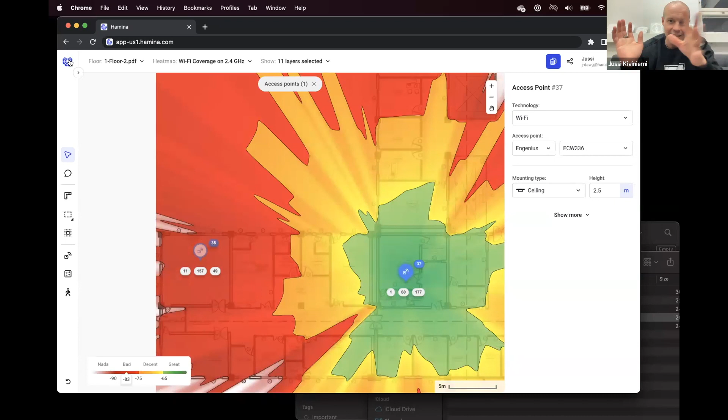All right, so today we're going to focus on demoing the product, looking at designing Wi-Fi, 4G, 5G, BLE, a little bit of the cabling side of things, as well as reporting. I think that's what we promised in the webinar advertisement, so least we can do.

How much time do we have? We have plenty, so should we start from scratch? We're just going to make a new project. Let's start with a university, and then we'll look at a more challenging environment later, like a warehouse, something like that.

Regarding our tool, it's completely web and cloud based, 3-dimensional, GPU accelerated, you name it, we got it. And this is what it looks like.

On the left hand side, we have the selector of projects, a couple of buttons, and then the main tools are here, like editing, scaling, drawing the walls, placing access points, all the key tools are here. On the top right hand side, we have generating reports, sharing the project, and then some account details.

All right, so I said let's start with the university. I'm just going to drop in a PDF floor plan, but anything is good, like PNG, JPEG, PDF, CAD files, whatever you throw at it. Even WebP, if you take images directly from your phone, that's all good, that can totally be used.

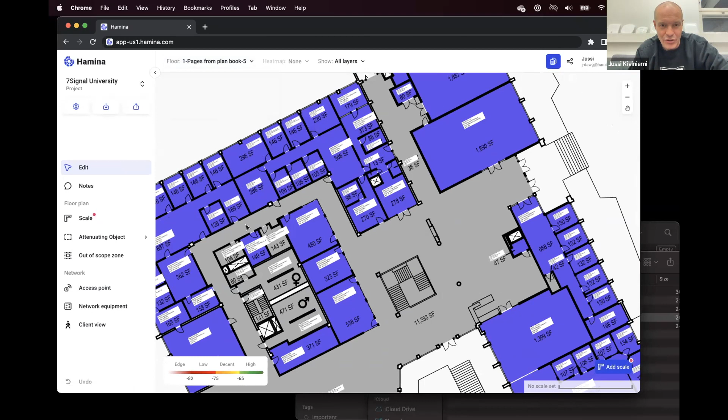And now, first step in a drawing like this, Jim, what would you do if you saw a floor plan like this? Start drawing walls and doors and things like that.

Exactly. But should we do something about the background colors first? Because this looks pretty ugly, right? Yeah, go black and white or grayscale. Yeah, let's at least remove some of the color. JJ just owned all of us in the chat by saying scale.

Yeah, exactly, sorry, I interrupted your demo, do your thing. Step number 1, scale, for sure. But step number 0, I would say, is clean up the drawing a little bit. And we have this color removal tool, so you don't need to go to GIMP or Photoshop or PowerPoint to edit images. Who edits images in PowerPoint anyway? This guy, but nobody else.

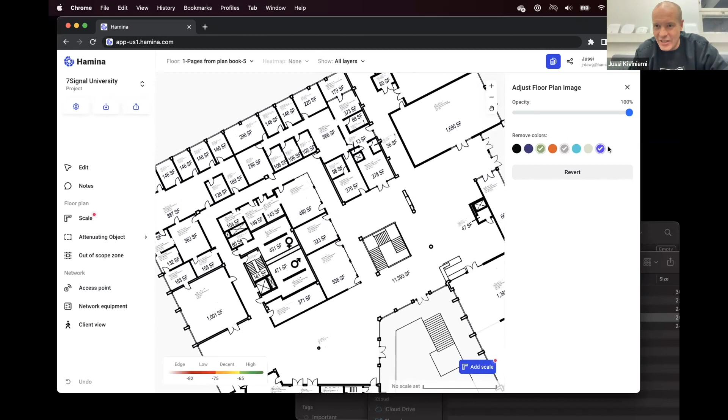So anyway, while the system was importing the image, it scanned it for colors you might want to remove, and I clicked on some of those, and now it looks a lot cleaner. It actually makes sense now to place notes and heat maps and things like that on the map.

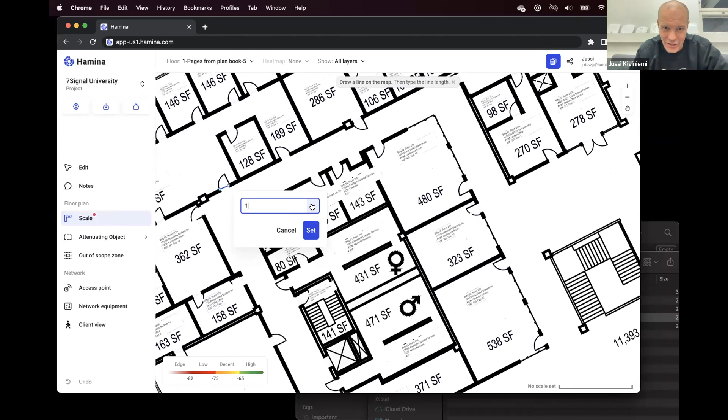But yeah, like Jim said, I guess we should probably put in some kind of a scale. If we did the do-not-try-this-at-home scale, that would be like 1 meter for the doorway, or you can change it to feet by clicking here. Don't try this at home, I just did it because I'm too lazy to find anything else. But essentially, we would just find a place where there's an actual scale and put it in. All right, so that's done, scale is done, and no more blinking warning lights in the tool.

Next step would be either drawing the walls, like Mr. Vajda said, or we could actually cut some corners. Since this is a PDF file, and PDF files most of the time are vectorized, when you look under the hood on a PDF file it has all this crappy stuff. But from all of that, we can actually start seeing, these actually look like windows a little bit.

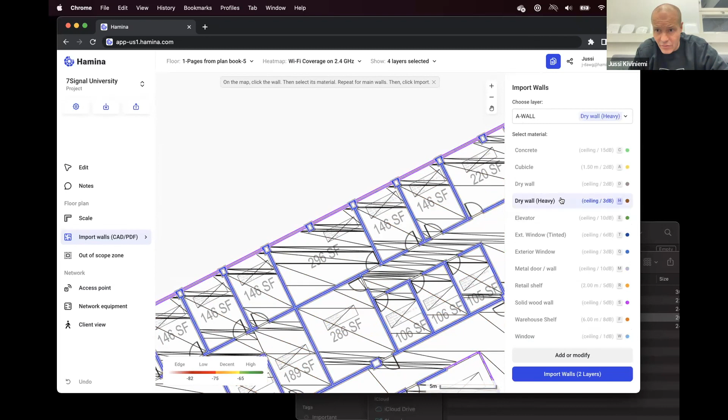So I'm going to say that's window layer in this PDF. And maybe those are some kind of drywall. And then maybe those look like doors.

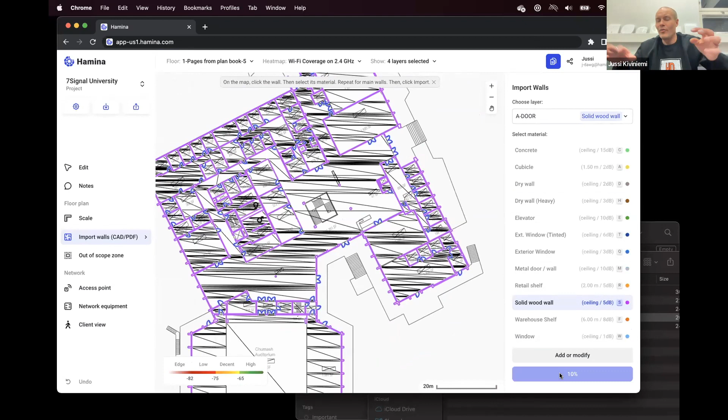Now anything that has color on it will actually be automatically assigned into walls. This is starting to look pretty good. We can always bring back more walls later, of course, and it's completely integrated into the UI. But let's first bring those walls here and see what happens.

So this just means we do not need to draw the walls. And here you can see the end result. That actually came pretty good. There's the windows with blue color, there's the drywall. And this works on vectorized PDFs as well as CAD files.

Since we're still missing a little bit, like here, we didn't get the staircase, so let's actually draw that manually. I'm just going to say that's obviously a brick wall. Since it's probably fireproof, I could even use concrete and probably not go too wrong with that. So I'm just going to say that's concrete right there.

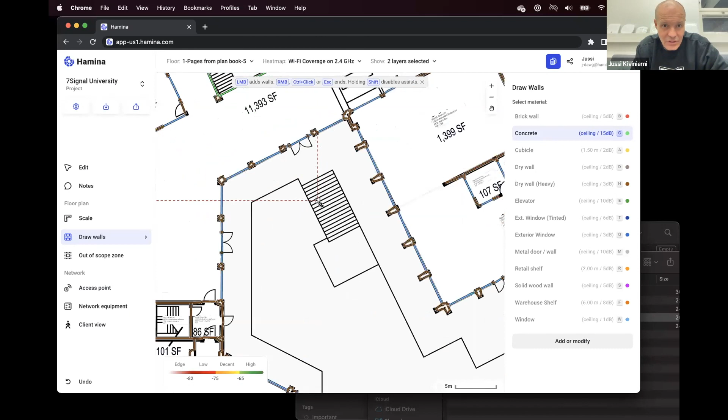We can manually, of course, fine tune this as much as we like. So there we have a pretty decent model for moving on. Okay, then we're ready to start designing.

Let's start with Wi-Fi, the easy, obvious stuff. Since we are not in for anything but latest and greatest, I'm just going to deploy the Aruba 655s. And this is kind of the minimum set that we need to use.

Since this is a carpeted indoor space, I'm just going to say, yeah, sure, ceiling is fine. And then the average, or this height, is probably all right. You can choose from different mounting types—kudos to Drew Lentz. There's also a Wi-Fi stand here and all kinds of wall mount, floor mount, L mount, whatever you have. And I guess we're ready to start designing.

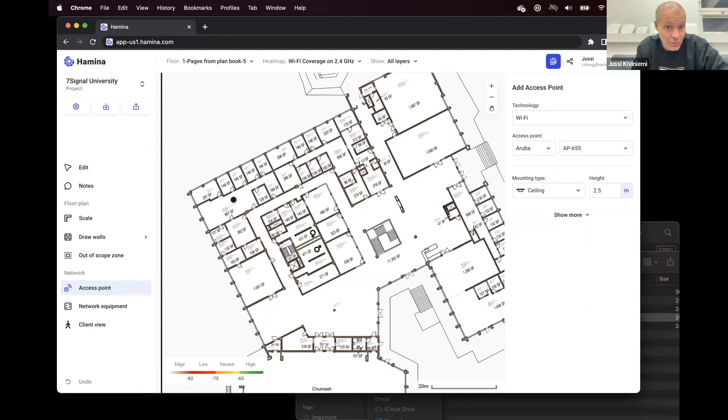And one of the key things for design, of course, is requirements, and that should be the first and foremost thing. For us, design requirements is not only about numbers, but it's what you call them. So this is important in customer deliverables and reports, because this is what the customer will also see.

Anything above -65 is high and green. Anything between -65 and -75 is decent and yellow, and so on and so forth. And that is then reflected on the map as well.

And as we start painting the map green, if you will, let's look at 5 gigahertz instead of 2.4. Well, let's actually look at 6 gigahertz since we have 6 gig capable APs. All right, and yeah, that's starting to look good.

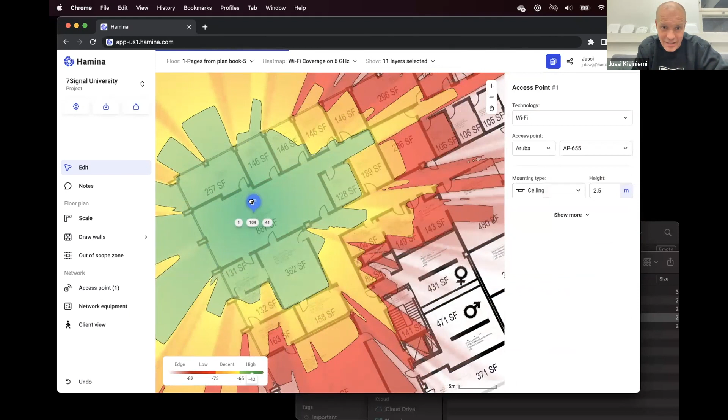I'm going to hide the AP numbers. I'm going to hide the walls since we are done with the walls, and we can start designing. Of course, this doesn't show up to you as real time as it is on my local computer, but you can see as I move the AP, the coverage patterns immediately update.

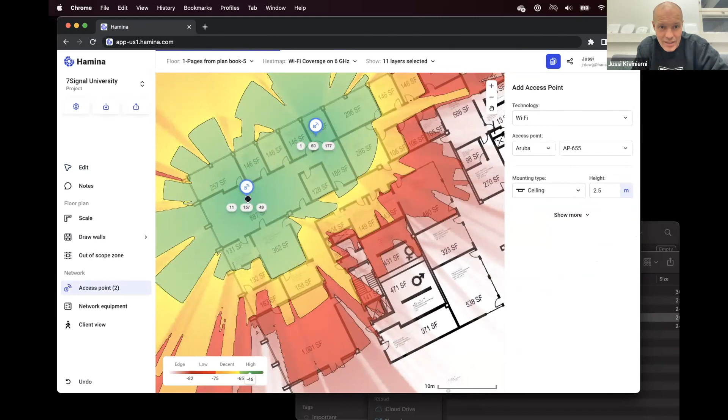And as I place APs, you can see the channel planner is run every time I do changes to the network, so we can see 1, 6, 11, 6. And if there's an auditorium like in here, and I place several APs, then it might disable some of the 2.4 gigahertz radios and stuff like that.

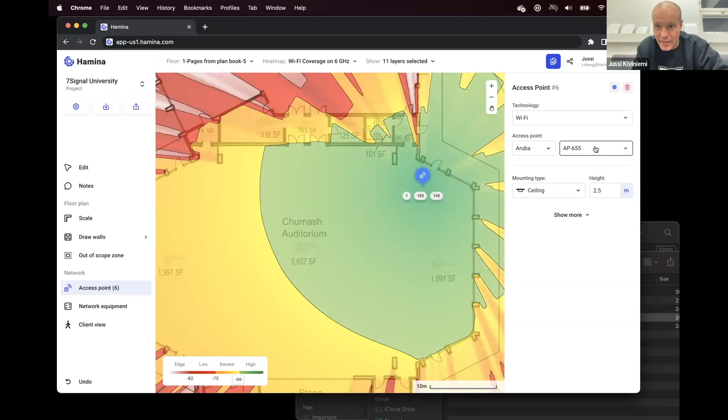And let's actually look at 5 gigahertz since some of the external APs may not support 6 gig. So we'll put in an Aruba AP that has an external antenna on it. Well, let's use Acceltex for that. And then we'll use a highly directional antenna.

And in this auditorium, we can only place APs as high as 15 feet, because they have to be mounted on the wall—or even, sorry, let's say 25 meters. So it's a very high ceiling auditorium. Well, that's a really high ceiling, but let it be.

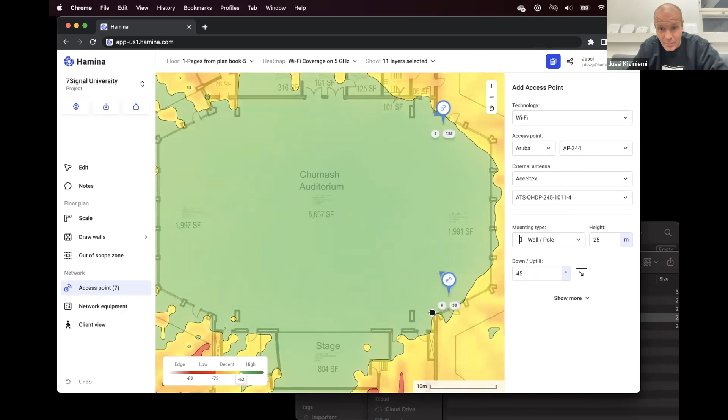And then since the signals don't quite touch the ground, since we're shooting to the side, let's just shoot down, and there we go, looking much better. And let's put one on each corner, or at least a couple there, and there we go, there we go, and there we go.

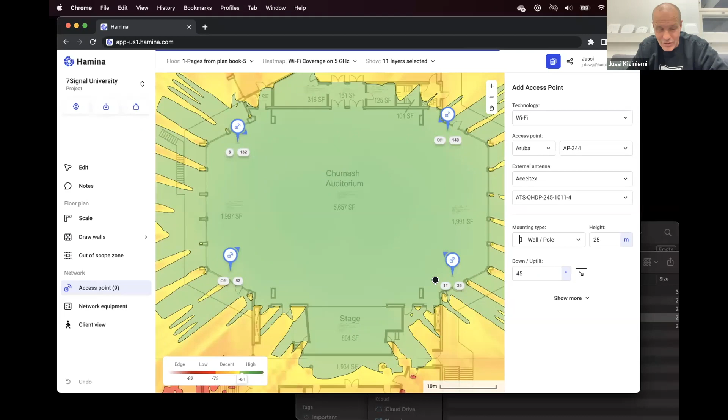And right now you can see that, yeah, actually the channelization algorithm disabled one of these radios and one here, because there's leakage from up here, and it sees, hey, actually the 2.4 coverage doesn't get any better even if we utilize more radios. So we're only using 6 and 11 for this site and stuff like that.

So we're starting to slowly but surely make a decent wireless design for the site. And of course, there's different vendors here, everything from MikroTik to Ubiquiti to Zyxel to Fortinet. You know, it's all here. And now would be a good time for some questions if there were any.

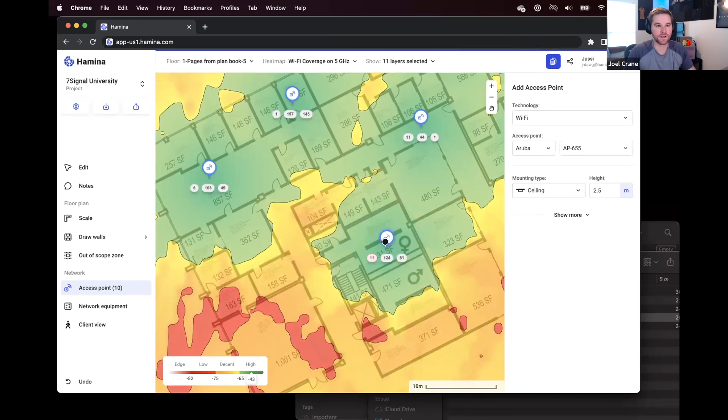Yes, there are several questions. I'm actually holding off on a couple until later. David's got an excellent question that's a perfect setup for a feature I think you're going to show. Yeah, Nick's got a question that's a perfect setup too. We'll send those guys their $20 later.

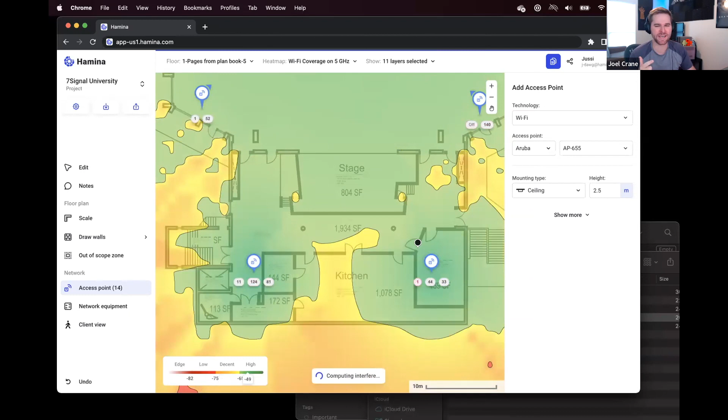David asks, will it read and auto scale with AutoCAD files? That's a great question. Joel, you want to take that, or should I?

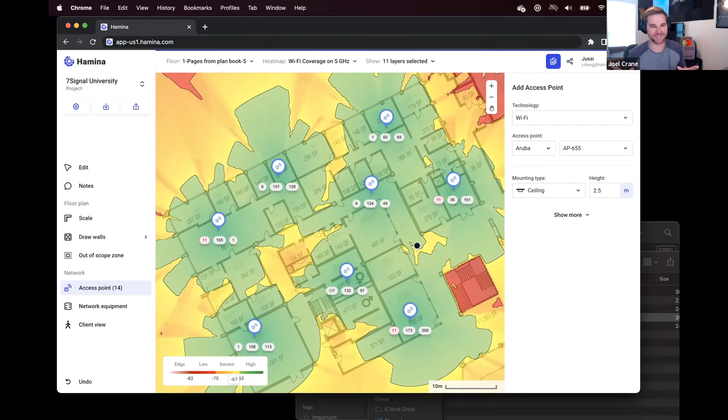I can give a little background on that one. The short answer is yes. The long answer is trust but verify. I spoke to the engineers about this just a couple of days ago, and it turns out reading a scale from a CAD file is not straightforward at all. It's actually all over the place depending on the CAD file. So at this point, put it in there, but be ready to grab the scale tool and check really quick to make sure it's right, because we see about an 80% success rate, but that 20% of the time could really get you. So just be sure to check and double check that it's right.

Great question. And yeah, so auto scale and the walls, kind of like what I showed you, it's identical, the UI, whether you get it from an AutoCAD file or a vectorized PDF.

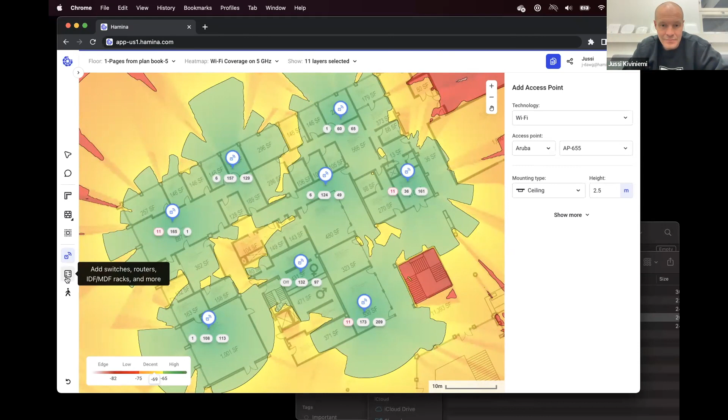All right, so should we look at switching a little bit? I placed a couple of switches, one up top, one here at the bottom. So using the network equipment tool, it's not just about Wi-Fi, right? Especially with 6E access points, it's more and more about how much power the APs are draining. Let's say I have a 24-port, 300-watt switch here.

So far, so good. But if we keep adding more, especially more of those power-hungry 6E APs, we might be running out of power on the switch. We might be running out of ports too. So definitely you want to consider those things as well. For example, if we had the same 300 watt switch here, we would see that's not going to fly. And also if we have an extensive number of APs, or things on the network that are also draining switch ports.

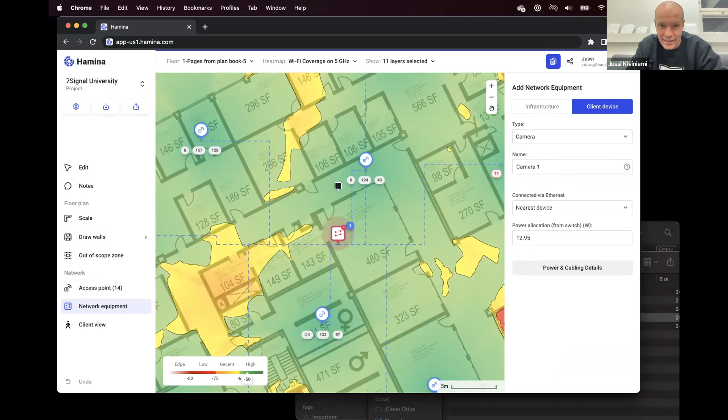Let me just disable the heat map real quickly, and maybe the channels as well. So if we have things like cameras, environmental sensors, door locks, desk phones, and whatever else may connect to the switch, that also might eat power. Not only will we run out of power on the switch, but we risk running out of ports as well. You can check the details here at the power and cabling details.

So just make sure when you start to roll out Wi-Fi 6E, and if you do a rip and replace for Wi-Fi 6E access points, first you want to check the PoE power consumption of the Wi-Fi 6E APs. Secondly, you want to check how this AP works on low power mode. How many streams do I lose in low power mode? Will it still work even if I don't have BT power, but only AT power on my switch? Spoiler alert, I think all of them will work with AT power, but some features will be reduced. You might lose some streams, spatial stream stuff like that, and some of the maximum data rates on some APs, things of that nature.

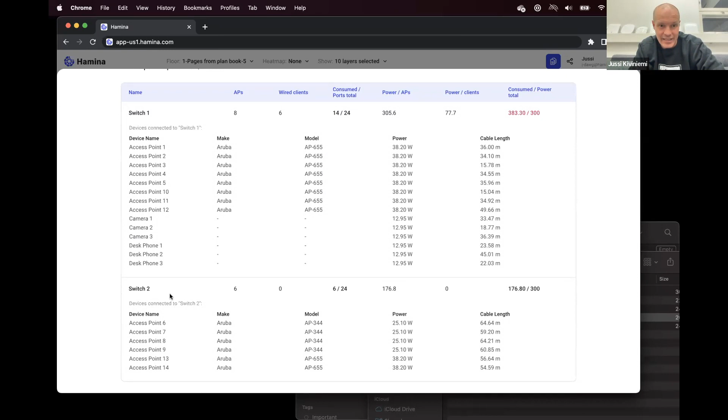All right, so here's a rundown of the two switches we placed, whatever is connected to the switch, how much cable, and we throw a little bit of slack on the cable. We also provide warnings, so if you have too long a cable, not so fast. Considerations like that. And it's not just switches and cameras and things like that, it's also, you can put in IDFs and MDFs and things of that nature as well. That's kind of how you would work out the switching side of things.

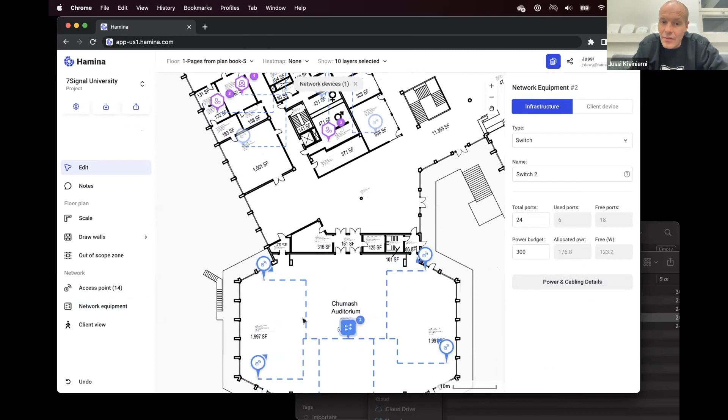So what else should we know? Now that we've done some of the fixed network, should we look at before we move into the BLE and 4G, 5G stuff? Should we look at client view real quickly?

Joel, you want to talk through the client view, and I can present while you talk? Yes, absolutely. What alert? We've never done this before. I'm just throwing Joel under the bus. Thanks, I appreciate that so much, Jussi. Thank you for throwing me under the bus.

With the client view, our engineers looked at a bunch of different clients, specifically their band preferences, roaming behaviors, and specifications, and plugged all of those behaviors into Hamina so we can simulate those devices. For example, for the iPhone, they looked at Apple's specifications. For Android phones, they cracked open the Android Open Source Project code to see what the roaming behavior is. Then you can click and drag that client device around on the map, and Hamina will attempt to determine when the client is going to roam based on its band and roaming preferences.

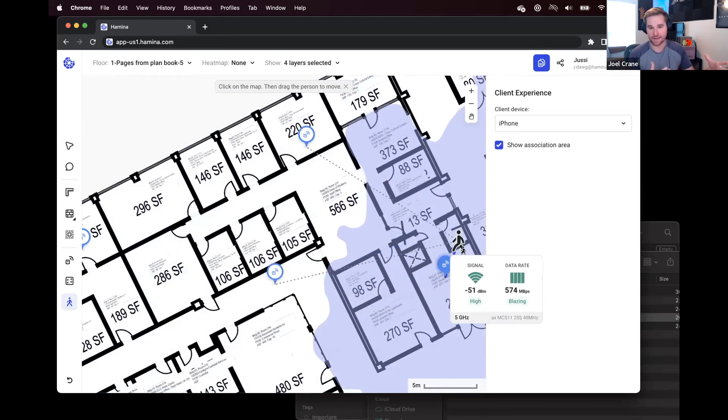Now, the way I see it, we're never going to get this 100% right because roaming is such a deeply involved thing and every client handles it differently. There's a lot of factors that go into it, but I think we can get pretty close. What we're overwhelmingly seeing users use this for is as a training tool. For example, if a customer says, hey, in our hotel just put the APs up and down the hallway, our users do a hallway design and then show them what the roaming performance is going to look like with all the APs in the hallway. That helps the customer or manager understand, hey, that's why we don't want to do this. So that's what we're seeing people use it for.

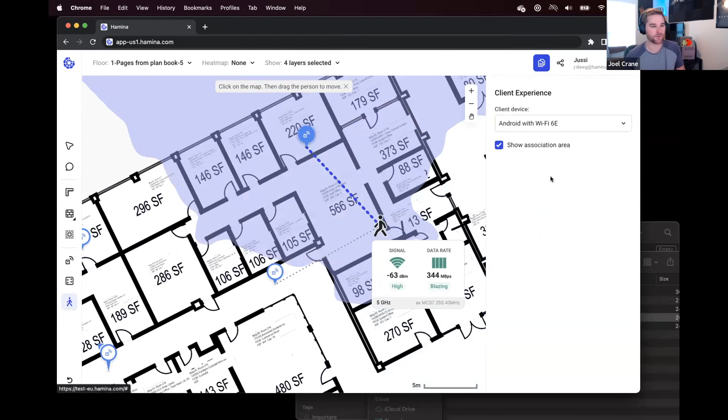So Jussi has thrown some APs in the hallway. You can see our Android with 6E is associated with that AP and it just hangs onto it. Even if we go all the way down to the corner there, when that client rounds the corner, it's just going to fall off a cliff and probably have a pretty tough time executing a roam to the AP around the corner, because there wasn't a whole lot of time as that client was moving. It's probably not going to result in a good experience for the end user.

So yeah, Jussi, is that everything? Did I get all the high points there? Dude, you definitely beat me. Jim, I've heard you give the spiel. Should we throw Jim under the bus as well? Jim, what do you think, man?

This is really interesting. So what it's drawing there, is that the client's coverage view from the AP, or is it the downlink, not the uplink? This is the association area. So this is where it will stick to the AP, is the colored area. And once you move out of that area, it will roam.

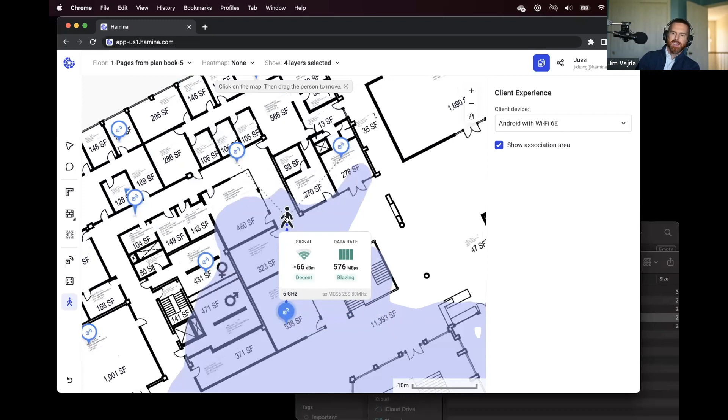That's interesting. I think the first time I saw this, I don't know if I noticed that the data rate was being modeled too. That's really useful. So you can really see the issues - for example, when you went around the corner, the data rate dropped significantly. And the MCS. Exactly. And when we switch from 6E Android to iPhone, we can see number of streams drops, 6 gig support drops and stuff like that, and now the data rates are much more conservative. But of course, that doesn't mean the connection would be any worse. Who needs 900 megs anyway, typically.

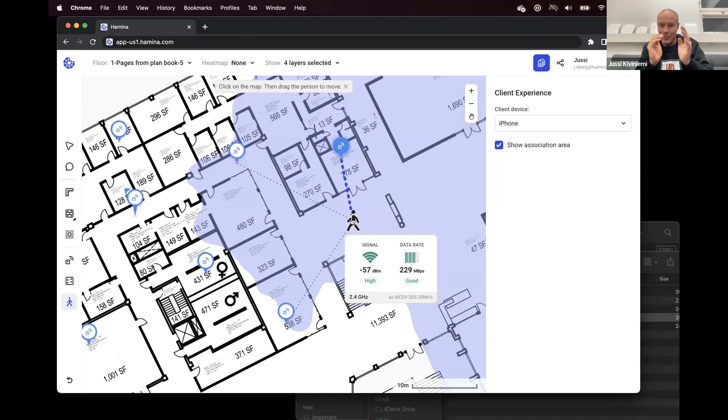We've seen things like the iPhone does funny things when you're at a place of very low coverage - it will probably fall to a 2.4 gigahertz connection because that's where it gets a better connection. And when you approach the AP again and get better and better coverage, it will hold onto that 2.4 radio until it's time to roam again, because it's determined, okay, this is actually a decent radio, I associated here when I was at poor coverage, but it's working pretty well, so I'm going to hang onto this 2.4 radio. It depends on the client's band preferences - an Android phone, for example, will behave quite differently in that situation.

So initially, when we were talking to a boatload of Wi-Fi geeks, they said nobody has solved the roaming problem - you need some kind of roaming stickiness evaluation and roaming estimation tool so I can optimize my roaming stuff. Then we gave this to the public, and people said, yeah, this is a great tool to show my customers how the network actually works. And we were like, no, that's not what it was for. But it's great that it's used - we don't care for what. And it turns out people like to use this for reporting. I think that's a good use for it.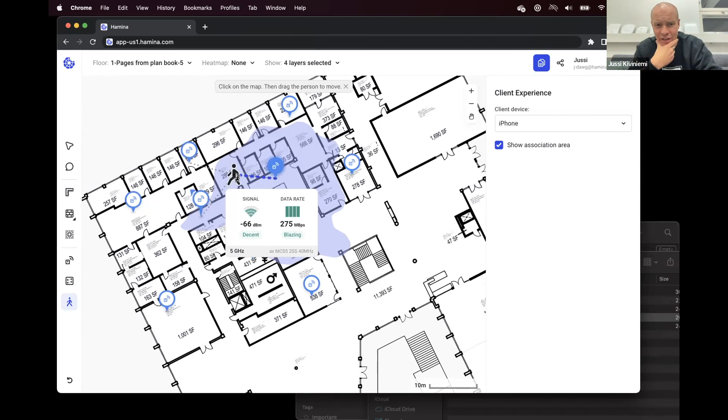Exactly. And I'm sure what we live with is kind of the specs, or the source code, or against-NDA specs of how the roaming should work. But I'm sure the 7signal system would catch those situations like, hey, it doesn't work at all like what Hamina predicted, and then you start looking at another driver bug or what have you.

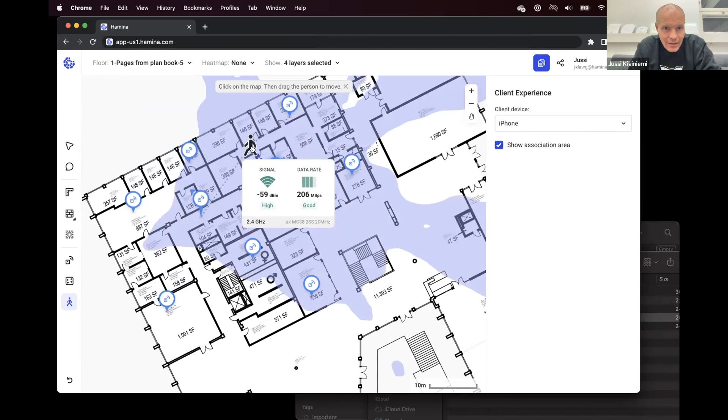Anyhow, so that's that. Should we look at BLE a little bit? I think BLE typically would be used for location tracking services, things of that nature, right?

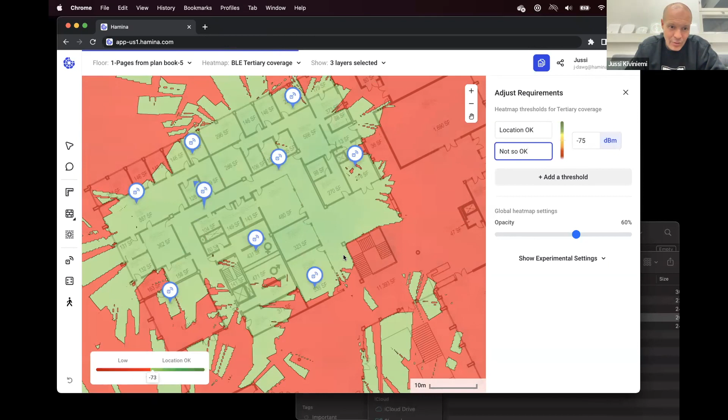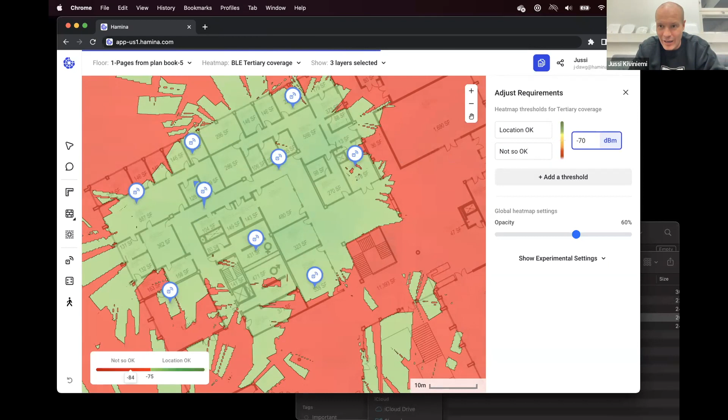Let's first look at the BLE heat map for just the APs. So what is this useful for? Primary coverage, probably not so much. But if we look at tertiary coverage—let's say we want 3 APs at negative 70 everywhere, well that's a strict requirement—we're going to put 75. So this would be like location okay, and then not so okay. Right now we're looking at: do I have 3 BLE signals audible in every location? And if we want this super accurate, like negative 70, we can see that's not even close.

So let's place some BLE beacons on the map, and of course these do not connect to your switch at all, because BLE beacons typically don't—they can if you want to, but by default they don't. And you can actually augment the BLE coverage to make your network location-ready by utilizing BLE beacons as well.

So this is just the typical use case for enterprise wireless BLE. Or what do you think, Joel, Jim, any other typical use cases for BLE? I think Zigbee is more for like ESL, electronic shelf labeling and stuff like that, but BLE typically I would say location services, or what do you think?

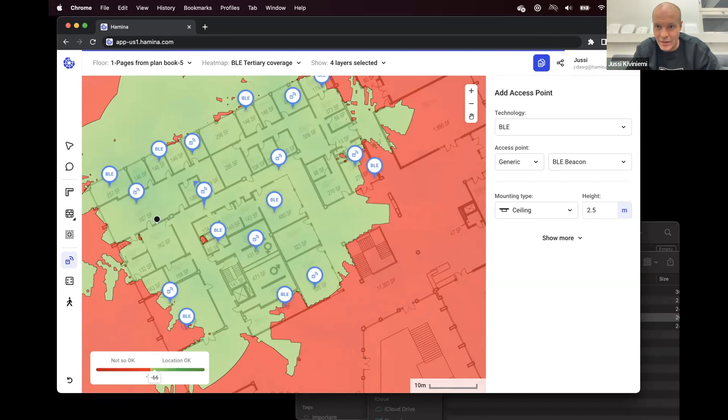I was tuned out answering a question, so I think it's all on Jim. I got thrown under the bus, so now I'm throwing Jim under the bus. Wonderful. Yeah, definitely location services is the top use case for BLE beacons.

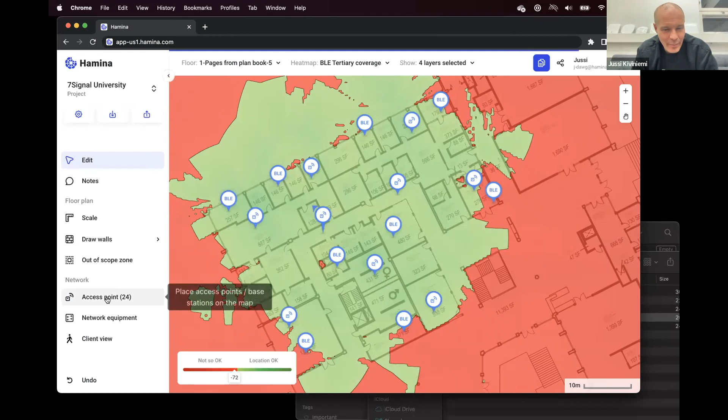All right, and to fill the map with even more stuff, how about we look at—since we've been on the same project all the time—should we create Jim's warehouse?

This is actually the warehouse where Jim ships his 7signal gear out from to customers, especially the software. The software gets shipped from this warehouse. So we send it on mini CDs. Yeah, oh yeah, you use CDs. I mean, we use 3.5-inch diskettes, but we're not that advanced yet. You guys are just getting started. That's okay, yeah, we'll get there.

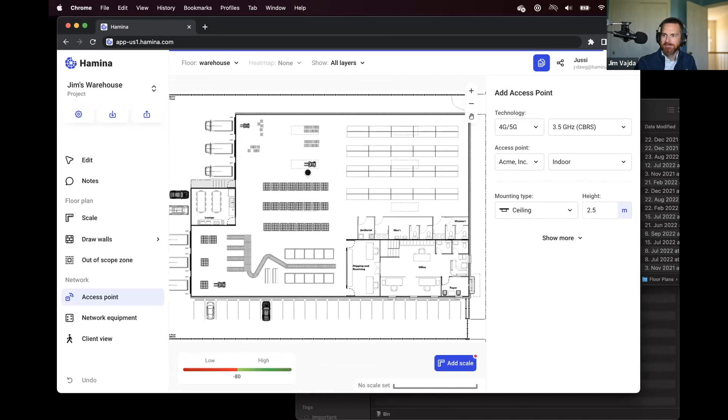Okay, so now that we brought in a pretty rudimentary JPEG of a small warehouse where we want to do 4G, 5G network planning, or private cellular network, on a warehouse, what do we do?

So we might want to draw these walls by hand. I'm going to say the exterior walls are concrete, except let's say next to the truck's loading bay, it's metal doors, but here it's concrete again. And I'm actually using the shortcut keys that you can see here to change the wall material so I can pretty snappily go about and do the main walls.

I'm going to hit D to do drywall here. There we go. And then I'm going to hit H for heavy drywall, draw a little bit of that. And you can see it intelligently snaps into different places on the map where it thinks you may want to stop drawing and stuff like that.

An example of snapping would be if I draw this wall of the janitorial closet, and then I continue drawing from here, it says hey, you might want to snap here to align it perfectly with the wall on the janitorial closet and stuff like that. So that's what we do, and I'm doing a terrible sloppy job here, but never mind.

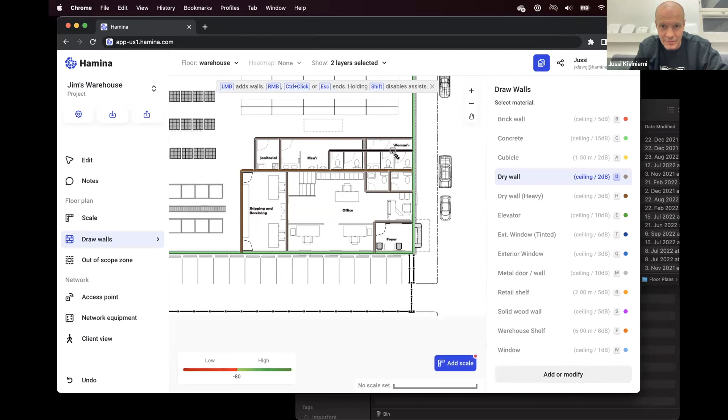So that's how you manually would draw the walls if the drawing is not of great quality and good format and stuff like that. But it's not just the walls either.

It's also attenuating objects like warehouse racks. So here we have a 7.60 meter, so I don't know, 30 feet warehouse shelf, which these happen to be. So I'm just going to say these guys are 30 feet, and there's our office cleaner. This is what you get from—if you can hear a vacuum cleaner, our office cleaner is here.

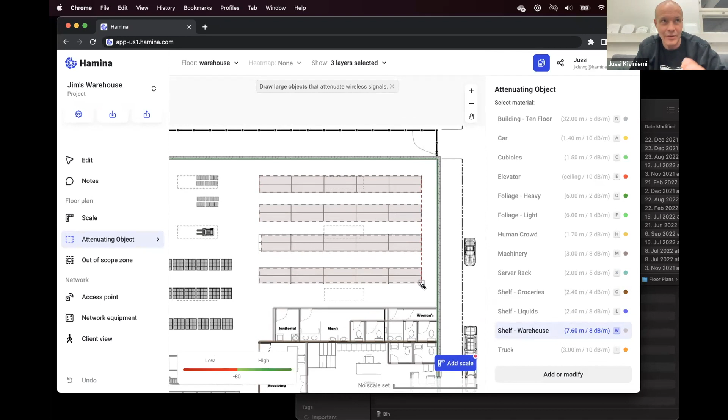It's what you get from an evening webinar.

So we did that shelf, and everything is completely customizable. I'm going to make another shelf that's just 4 meters high instead of 8 meters, so half the height.

This is where you can customize everything when it comes to wall materials and attenuating objects. The objects are kind of like wall materials - they have height, they have attenuation, but they're just thicker than walls. Typically they attenuate a little differently.

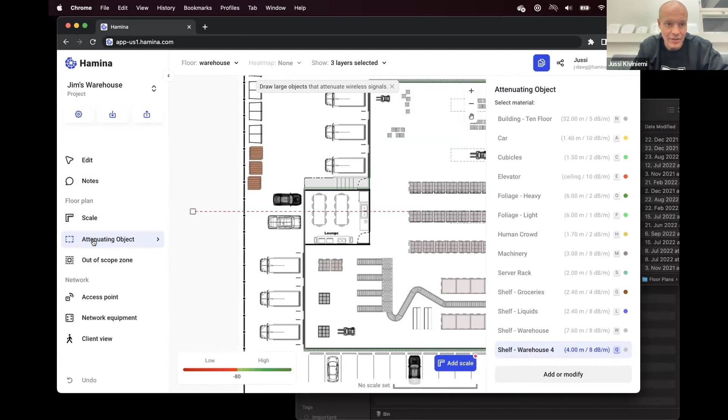So here we go, we start to have the pallets in place. We have most of the wall materials. I'm still going to draw a little bit of drywall in here - see how nicely it snaps, makes perfect drawings.

Okay, so what do we got? We have walls, we have attenuating zones as the shelves. What else should we do?

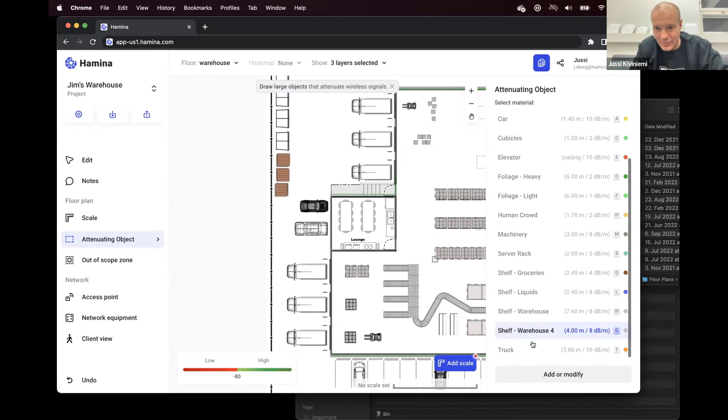I like drawing the trucks as well, in case we need coverage at the loading bays. We have a truck material pre-made here as well. These are yellow trucks, not brown like UPS. I don't know which would be yellow - maybe postal offices, something like that.

So we have now fully modeled this small warehouse, and we are ready to start doing the 4G, 5G planning. We'll use Airspan 1030 for 4G, or is this 5G access points, and we'll start rolling. But before that, what do we do?

We set the scale again. And again, he's using the door. Do not use the door, you see. You don't use the door, you fool.

Sorry about that. I think Heather really might kick you out this time. Oh man, my hand's on the button. This is the most brutal webinar I've been in, like, at least 2 days.

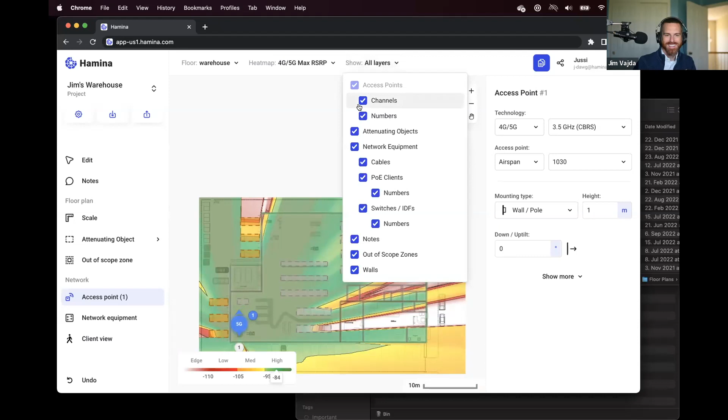All right, so here we have the AP. As you can see, since it's a 5G AP, it actually provides quite good coverage. Even if it's placed low, it goes through many of the shelves quite well.

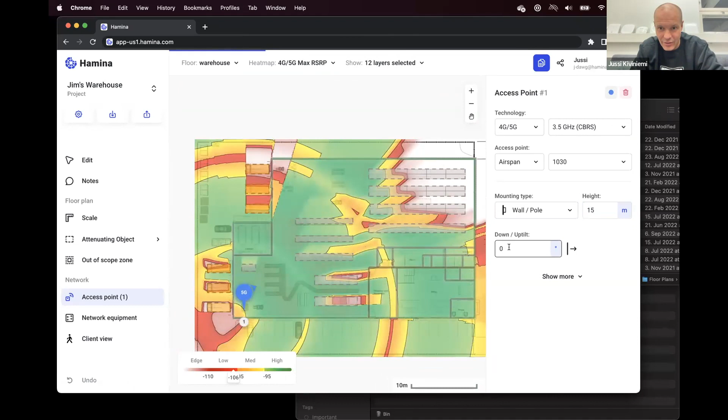But in this case we probably want to put it to the ceiling of the warehouse, and then give it some down tilt. Here we go, and you can actually see the ripples here quite nicely. All the antennas are really carefully 3D modeled, so you can see the impact it makes and the ripples of the omni pattern, which is kind of cool to see.

And then behind these highly attenuating shelves, we would probably put an AP for each of the - what is this shelf, between each shelf, I don't know how you say that in English.

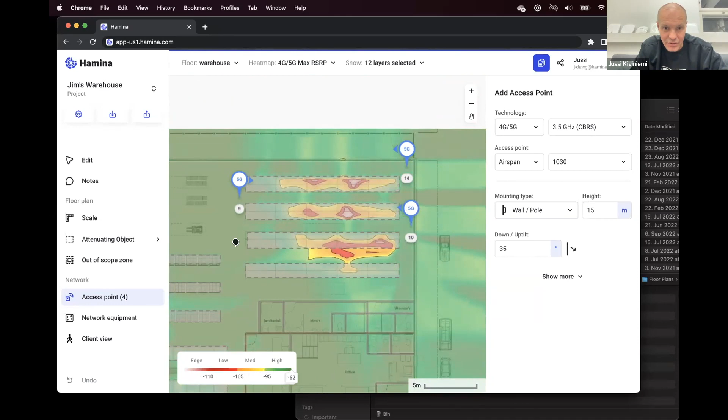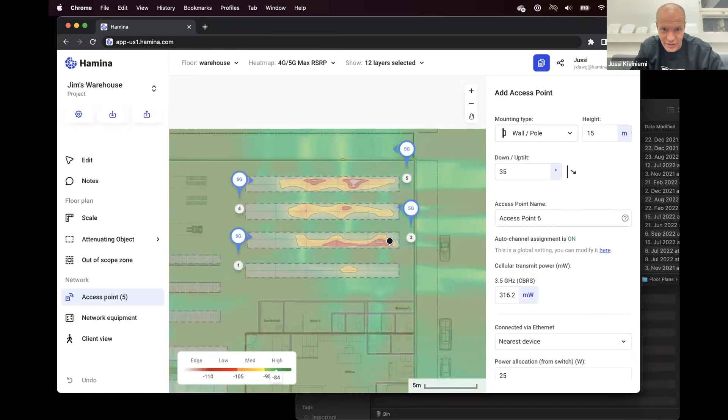As you can see, it's also optimizing the CBRS channels for now, not just Wi-Fi channels. And since with CBRS we'd typically have less channels available, we could just untick some of these, and whatever we get from SAS or Spectrum Access System. So now it reruns the channel algorithm using just those channels that we have.

That's kind of like, all I'm trying to say is designing private cellular doesn't have to be way more complicated than anything else. Here you have the same settings as for all of the Wi-Fi radios, like transmit power and all of that, and we want to probably have that in dBm.

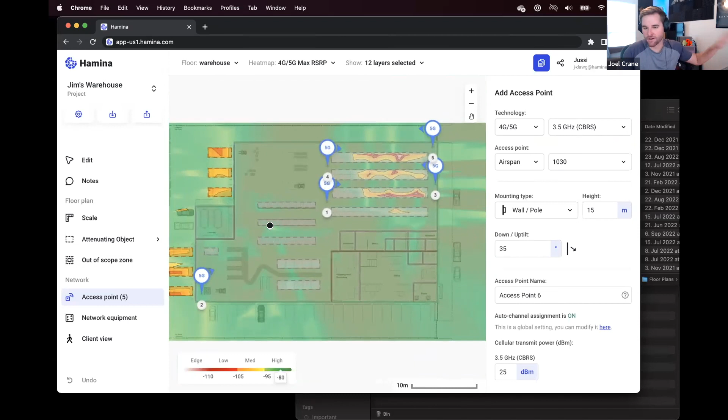Hey Jussi - yes sir, there's a question from Nick ages ago, feels like it was almost years ago at this point in the webinar. Nick asked: do you have an example of a warehouse where you can compare the number of Wi-Fi APs needed with the number of CBRS access points needed to provide similar coverage?

That's a great question. So if we really optimize this and can live with decent coverage here and there, let's say this would be maybe the number of CBRS APs that could be used in this small warehouse. The problem here is that very thick shelves attenuate a lot, no matter the technology, no matter the frequency. But we would use probably 4 here.

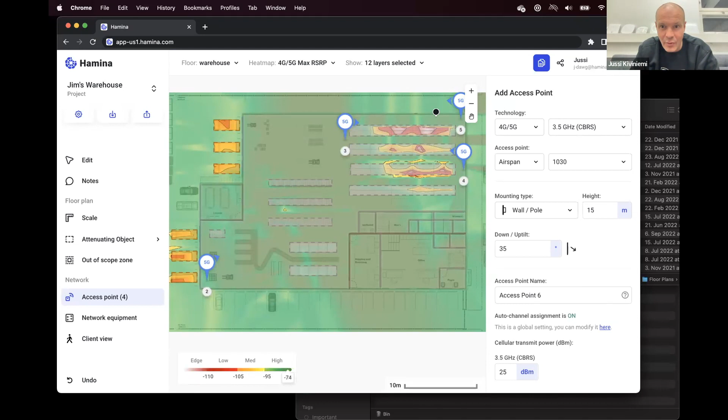Let's look at Wi-Fi next. That's a great question, we should almost declare like an extra winner here for that question - that's a very good one.

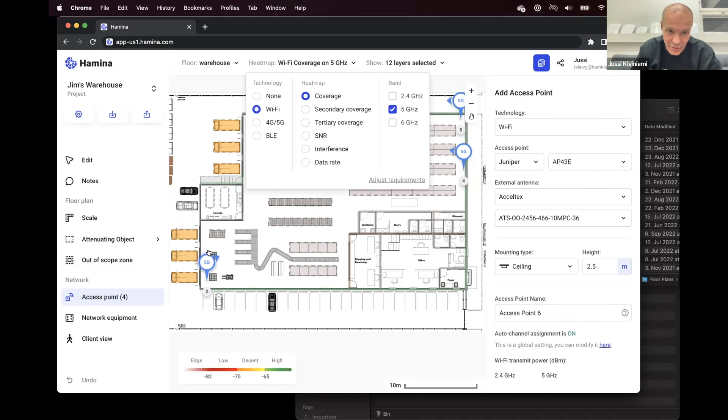This time let's say I'm going to use Juniper AP43Es, and we're gonna design for 5 gigahertz. I'm just going to say primary coverage for 5 gigahertz, so that it's a fair comparison, using the default settings in the tool. I'm going to use Acceltex antennas again, put these on something like 15 meters, point them down a little bit to get better coverage. And here we go.

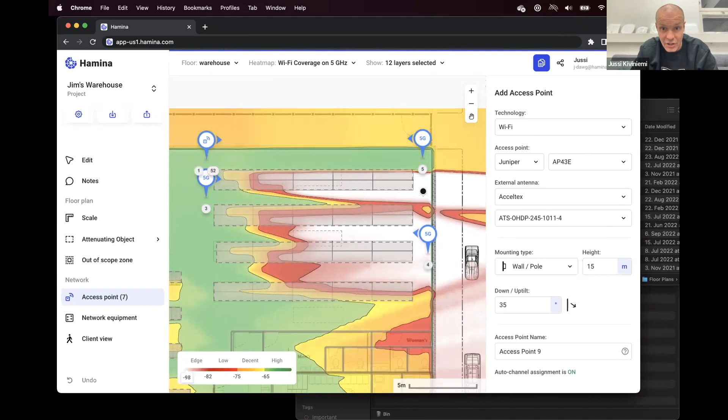You can actually see that here we do need more APs. We can't quite cover here, so we need 1 there. We still need 1 in the office. We'll put that later because that's probably going to be a normal, integrated antenna AP. But we need 1 here. We need definitely 1 for each shelf, between each shelf for Wi-Fi.

So I'm going to put those in, and let's take out the channels so we can see this better. Here we go. Then we'll put in a Wi-Fi AP again here. And it's starting to look decent for Wi-Fi coverage if we look at the overall Wi-Fi coverage. But I would definitely put 1 more here in the room.

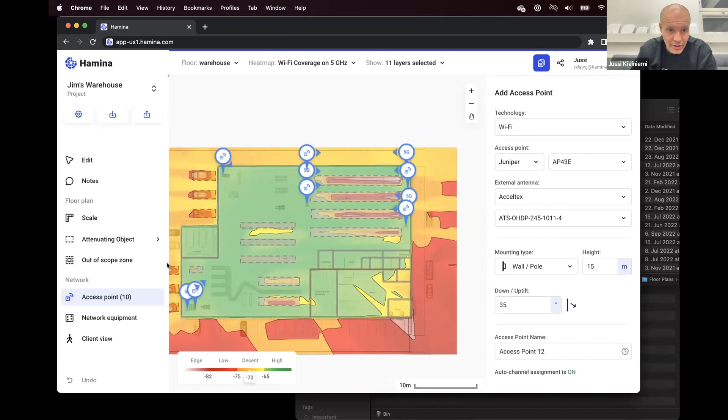And let's actually color the APs a bit differently. So we'll put Wi-Fi APs with a different color. We should actually have a different default color even for Wi-Fi APs. So I'm going to say these APs are orange. Can we see them very well? Maybe not, I'm going to say red. Wi-Fi AP is red, 5G AP is blue. All right, and then 1 more.

Let's say we'll use standard 43s for the office here. So what did we get? We got 1, 2. Well, actually, why are we even calculating this? Shouldn't we look at the bill of materials? Here we go. So we have 7 Wi-Fi access points, 6 with external antennas, and 1 with integrated antenna.

And then for 4G, 5G, we have 4. So in this specific warehouse, don't take this as any kind of typical number, you typically need a lot less, I would say, CBRS APs, but that's kind of what we're looking at here. And it's a nice way to look at our bill of materials tool, which automatically generates the bill of materials, and then you can customize everything to your liking.

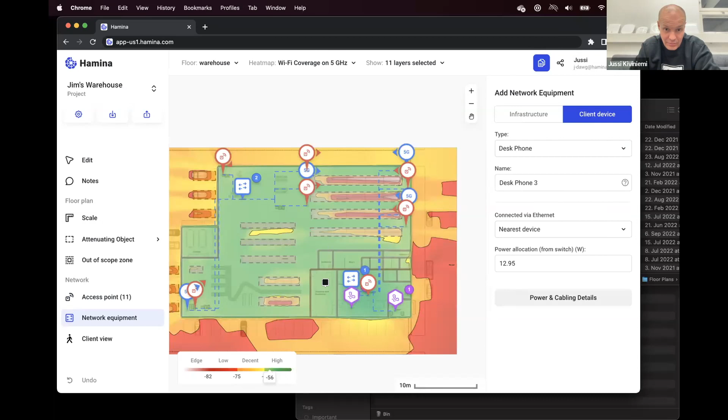So all the fields are customizable. You can add prices and brackets and what have you here. But that's kind of how we build the bill of materials. And if you also use things like switches and stuff like that, that's also there in the bill of materials. And those, desk phones—who uses desk phones? Well, a lot of companies apparently. Nothing wrong with that.

So all of that is in the bill of materials. Not just the wireless stuff, but the wired stuff and the cabling and the desk phones and what have you. I hope that answers the excellent question that we got there.

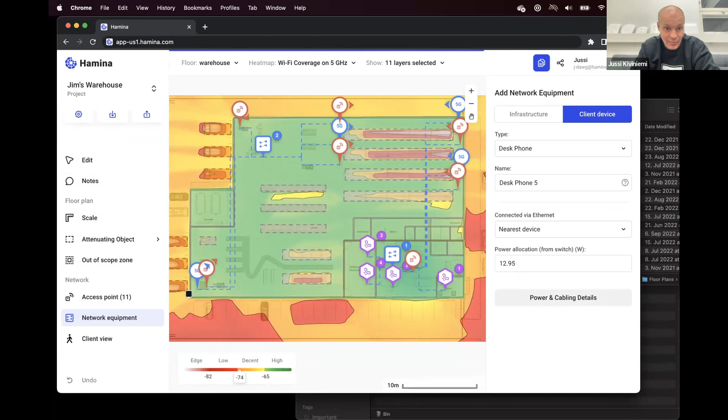And then if we don't want to care about outdoor coverage, of course, if we did, we could just place an AP outdoors and then it would calculate that. But if we don't even want to show the outdoor coverage, we can just create an out of scope zone here. So we want to limit the area of interest inside the map here. So everything else is grayed out and only the map remains.

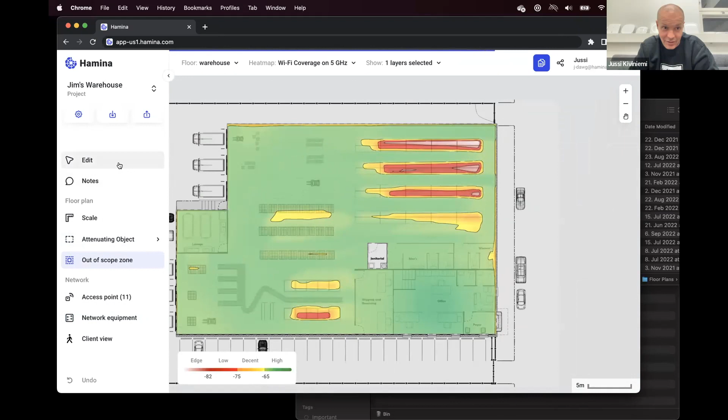And then if we want to exclude the janitorial closet, we just draw another out of scope zone here. And the men's room is in scope. Oh, that's definitely in scope. So here we go.

One more thing we promised to show was how to generate customer reporting out of this. So let's create a new report out of Jim's warehouse.

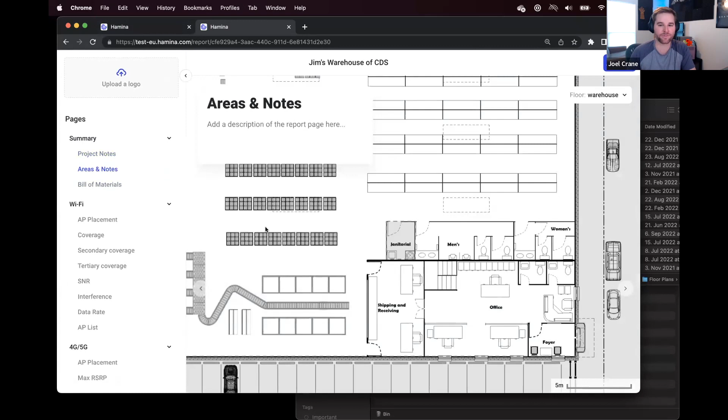And while you're typing that in, you see David asked, does Hamina have a free viewer? For example, if I create a design, can my cabling contractor view my design for free? So David, here's the answer to your question. Yep, this is the free viewer. So you can send an unlimited number of reports to anybody.

This is kind of the preview screen that you use to customize everything that you see on the report. Jim's bill of materials—this is for the warehouse hosting all of Jim's CDs, mostly Nirvana and Radiohead. There we go. So all of these screens are configurable.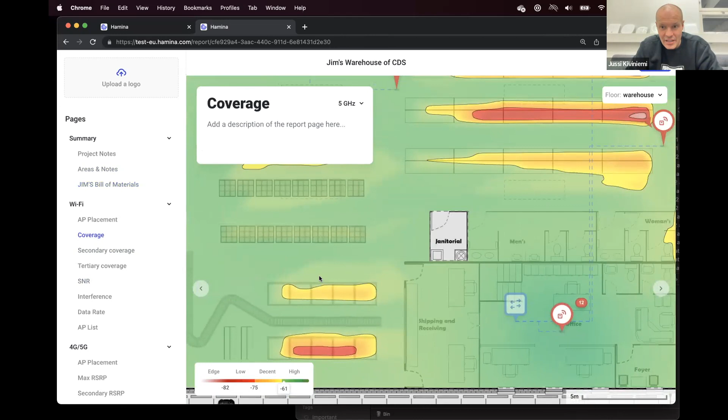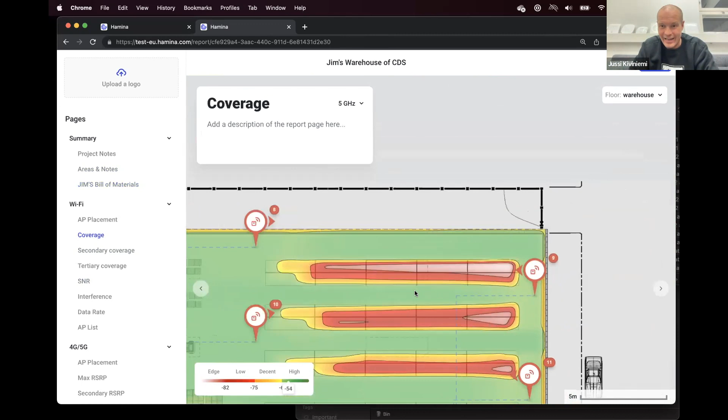And what's beautiful about this is if you want to see coverage maps, it's not like postage stamp sized images on a PDF drawing. It's actual zoomable, drillable reports with clickable APs. You can see all the AP details here. If you only want to create a report with AP placement for the guys who are placing the APs, they can totally see the same stuff without the coverage map.

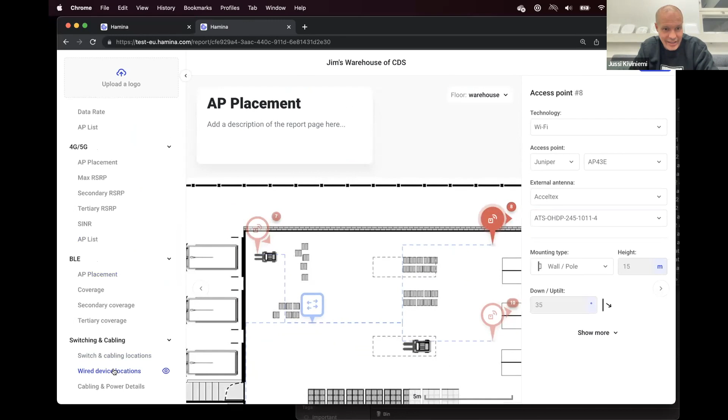It hosts everything: 4G, 5G, BLE, switching and cabling. If you want to see just where the switches are or what is my switching inventory and how it's connected via cable, stuff like that—all of that can be done here.

And then you just click the share button and share the report. I'm going to say Walrus is the password. I'm going to create the link. I'm going to copy this. And then dare I send it to the chat here? Is there? Oh yeah, not that anything has ever broken down before. What could go wrong? That might not have been clickable. That's definitely clickable, and the password is Walrus, of course.

You said the password is... Password is Walrus, yeah.

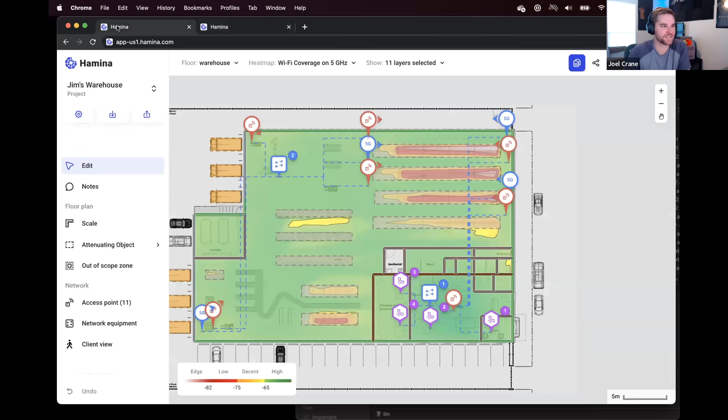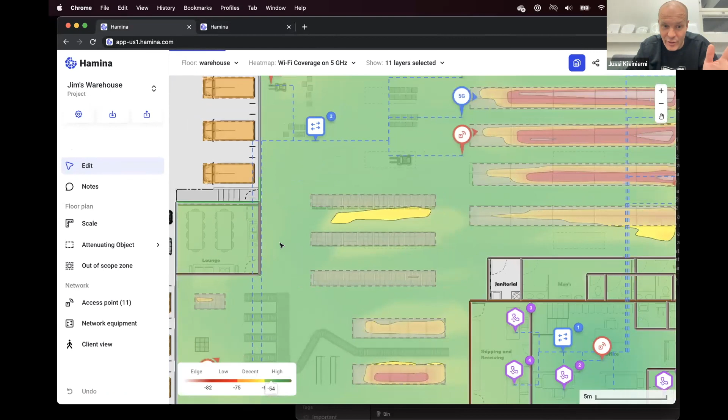You guys got that? Yep, Jim's warehouse of CDs. Anders says that we should really do this on Nakatomi Plaza. So next demo we do, this will be done on the Nakatomi Plaza floor plan.

All right, so that's much of how Hamina works. There's also a lot of yippee-ki-yay, where you can share this with the Hans Grubers and Carls and John McClains of the world by just clicking share.

There's a difference between reporting and sharing. Reporting is typically for somebody who's just reading the report, and in the report you can control what you hide and don't want to show the customer. If you don't want to show them the interference graphs, tertiary coverage, or data rates, you can hide that stuff. But when you click share, you actually share the entire project.

I could share this with Jim, so Jim could continue on the project and then share it forward to Joel, who could then work on it further. Sharing is for your colleague, while creating a report is typically for an end customer or somebody who only gets read-only access. When you share, you give them write access, full rights, and the permission to share the document further and create reports.

There's a lot of stuff we covered, but we only had an hour. We still have 10 minutes for Q&A, unless we want to talk about how this actually gets directly exported into different cloud-based systems. All you need to do is click a button from Hamina and it will automatically create the site.

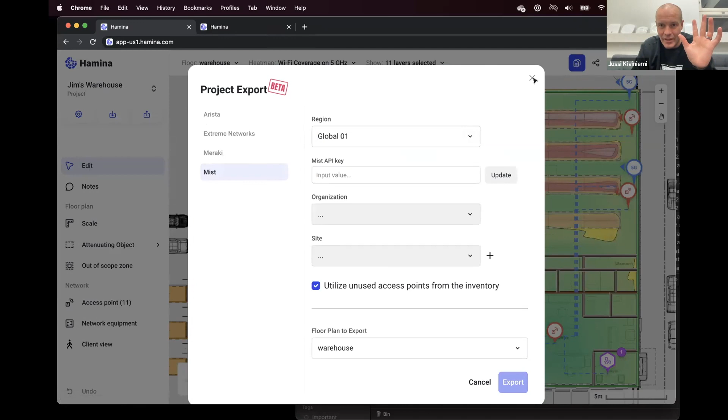In Meraki, Mist, Extreme, Arista - click of a button in Hamina, and it automatically creates the new site in Meraki, pushes the access points from inventory to the site, pushes the maps, pushes the AP locations. You don't need to go to the Meraki dashboard to start up a new site. All you need to do is the RF design, click a button in Hamina, and it exports automatically to Meraki, Arista, Extreme, Juniper, Mist, and many more vendors coming soon.

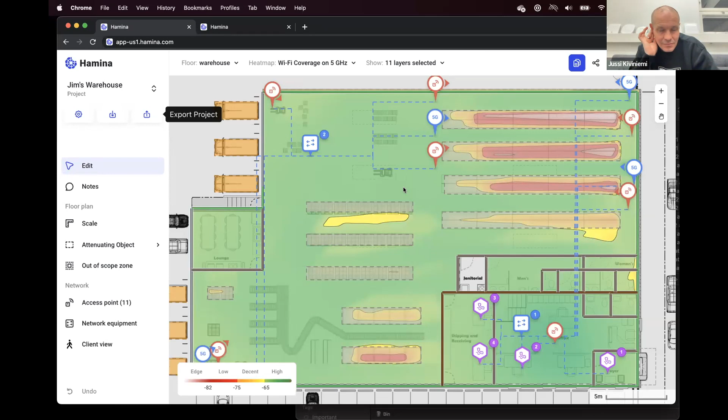Awesome. I feel like it's probably a good time to bring Eric out of hiding too. Yeah, something to talk about. There he is. Oh wow. Ooh, pretty colors.

Beautiful colors. Boy, how do we change that? Let's go to our settings, shall we? Yeah, maybe go to switch camera off and on. There we go, that was just a really cool transition. I was feeling a bit psychedelic there for a moment. I apologize everyone, but hopefully you can see and hear me. You okay? Are you dizzy? Only a little. We'll recover fully.

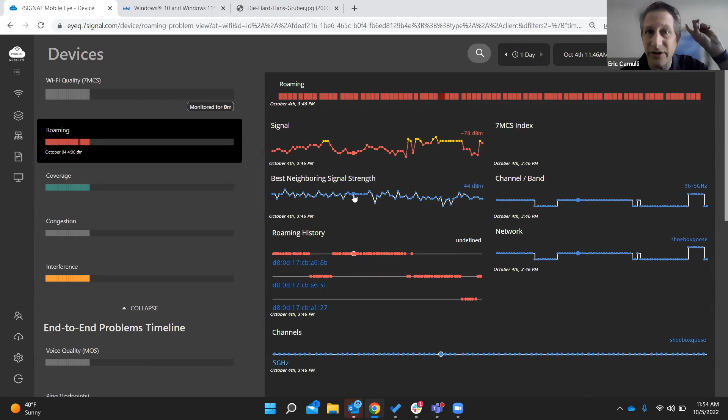Here's the problem: your device decided not to roam. So let's take a closer look at your device and its poor behavior before we point the finger at the network, right? I'm sure UC and Joel can appreciate that.

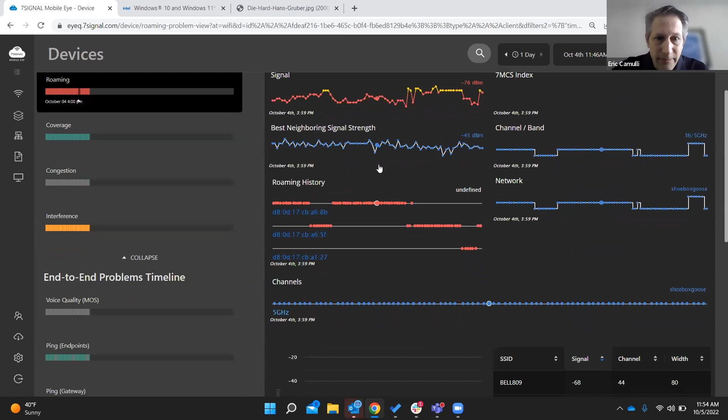Check this out, guys. Not only are we tracking the best neighbor, but we're also showing you the roaming history, so we can see how this device has roamed from one BSSID to the next, and it's all time-stamped. So we can see the behavior of this device and how it has performed so poorly over the course of hours, days, weeks. We're storing 90 days of data in the cloud for you, my goodness.

And we don't have the names of the access points here, we just have the BSSIDs, but imagine the names of the access points here, where you can then actually know where this person is in space. Where are they connected? What are they connected to?

And if that wasn't good enough, down here we're even drawing a picture for you, where every few minutes we're taking a snapshot of what's in the air. This is obviously somebody at home with a mesh network, and you can see the co-channel interference. This is how it always is, guys, right? The ISP just passes out routers to everybody in the building, and they're all on either channel 36, 80 megahertz wide, or channel 149, 80 megahertz wide. And so we all have to deal with this.

With this picture, we can now see what's going on. If we were smart, and if we had the ability to go into our router and change the channel, then maybe we can overcome this situation. But I love this example because it's perfect in showing that, oh my goodness, mesh networks are not necessarily all they're cracked up to be.

Look at this, guys. The Shoebox Goose network at minus 75, minus 75, minus 83. You got to spread these things apart, everybody. Get these things apart, you're not roaming. You bought this awesome mesh network, you put these nodes all around your house, and you don't roam to any of them. You're always at poor signal strength. What's the point of that?